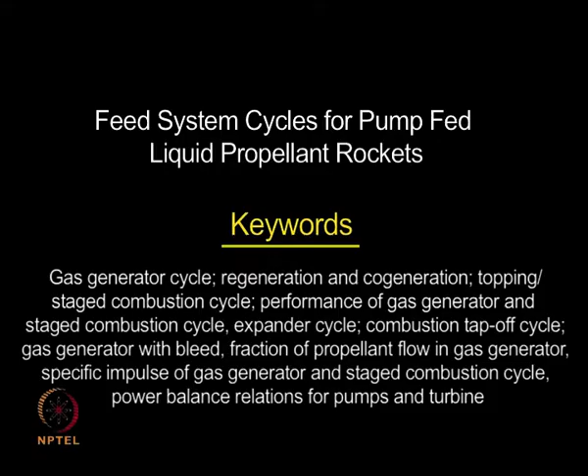Let us quickly recap where we were last time. We said feeding of liquid propellants can be done in different ways.

One was using a cold gas. Cold gas could be used either in the blow down mode or in a regulated mode. The difference is, in a regulated mode we draw gas at high pressure, maintain a constant low pressure on the propellant and push it out. In the blow down mode, in the tank itself we have some volume of gas known as ullage volume, which is pressurized initially, and you allow this pressure to gradually push the propellant, in which case the pressure at which propellant is supplied into the thrust chamber will keep decreasing with time.

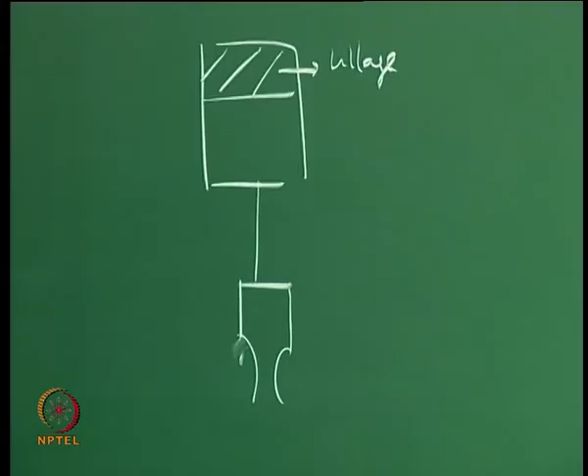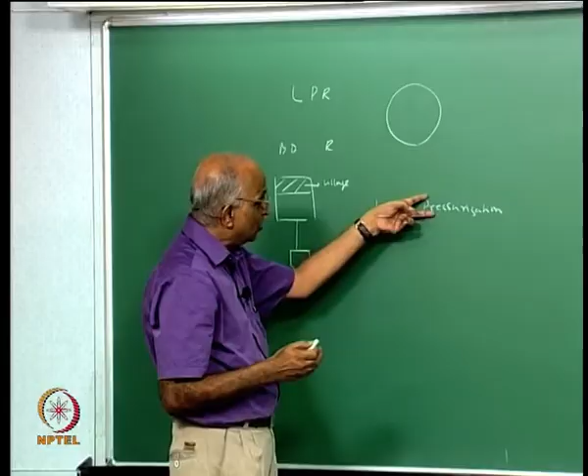While deriving an equation for the mass of gas required in the gas bottle, we found if the temperature of the gas is higher, it is better. Therefore, we also talked in terms of hot gas pressurization. But we said, even though it is advantageous, it has not been implemented so far and it will be worthwhile. In fact, there was one of the French engines which tried this, but they did not follow it up, but I think it is a strong contender.

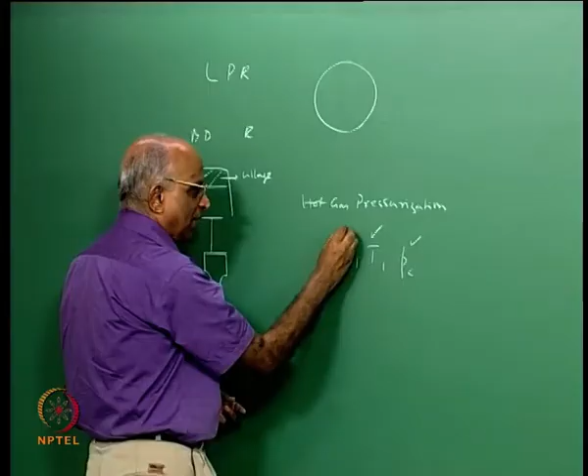We also found out that when the time of operation of a rocket is small, or when the thrust is small, or when the chamber pressure is small, we can go for something like cold gas pressurization in either the blow down mode or a regulated mode, or even a hot gas pressurization mode. But the moment the pressure of the chamber is large, or the thrust is large, or the time is large, we necessarily have to go for a pump fed system.

We also found that the amount of power required from the pump is enormous, something like for a 600 kilonewton engine we found that the power required is something like 2.4 or almost 3 megawatt, and we said even a large power plant like the Ennore power plant has only something like 450 megawatts of power. Therefore, we are talking of huge power, and therefore we cannot drive the pump using a battery or an electrical supply. Let's quickly go through where we were.

Therefore, in order to drive the pumps, we looked at this figure in the last class also. You have a fuel tank, you have an oxidizer tank, both are liquids. You sort of push this into the pump, maybe we need a gas bottle which pressurizes it to a small value, pushes it into the pump. I need to rotate these two pumps, for which I require a turbine. That turbine generates power and it pushes this.

To drive the turbine, I need something like a gas generator or a hot gas source which powers the turbine and the hot gas is exhausted out. The pressure built in these two pumps pushes the liquid oxidizer, pushes the liquid fuel into what we said was the thrust chamber. What I am circling now is the thrust chamber.

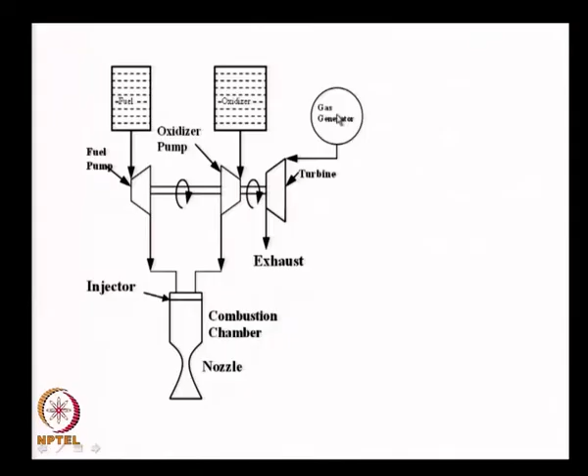Now, to have an additional thing for generating gas is difficult, because I need another set of fuels or another set of substances which can generate the gas, and the normal practice therefore is to make use of the existing fuel and oxidizer itself. How do we do that? We also looked at it in the last class.

Maybe after you are pressurizing the liquid fuel, you take a little bit of the liquid fuel into something like a pre-burner or a burner, which we call a gas generator. You take the oxidizer also, mix the two together, generate hot gases, push the hot gases into the turbine and exhaust the output from the turbine into the ambient. Therefore, you have a gas generator which is driving the turbine, which in turn drives the fuel pump and the oxidizer pump and supplies the fuel and oxidizer into the engine.

Such a feed system is essentially configured around the gas generator. How does the gas generator get the fuel? Maybe part of the fuel is bled, part of the oxidizer is bled from the lines, and it is used to generate hot gases. Now, there is a problem in all this, the turbines consist of blades, and it could be impulse turbine, reaction turbine, maybe we have to look at it.

But whatever said and done, if I put very hot gases into the turbine, and we said at stoichiometry the fuel and oxidizer generate gases at a temperature around 3600 degrees Kelvin, I cannot supply these hot gases. Therefore the output of the gases from the gas generator must essentially be a small number, maybe around an upper limit of 900 Kelvin.

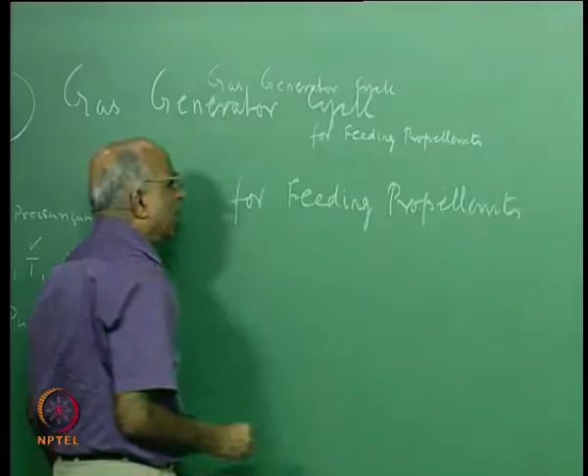Unfortunately, when we learn thermodynamics, we say a cycle is something wherein things come back to the initial state. But this is just using a gas generator to feed propellants. The word cycle here is not related to a thermodynamic cycle like an Otto cycle, Joule cycle, or Brayton cycle. It's just a gas generator fed system, but conventionally it's known as a gas generator cycle for feeding propellants, and I use the same terminology. We also told ourselves in the last class, well, this is what I had in mind.

We said that the temperature of the gases as a function of mixture ratio is such that the maximum temperature occurs just below stoichiometric, so you get a slight shift. Instead of maximum temperature occurring at stoichiometry, it's slightly fuel rich. But when we need a much lower temperature, maybe I have to operate the gas generator in a very fuel rich region such that I get only around 800 to 900 Kelvin, or maybe a very oxidizer rich region wherein I get a low temperature.

Oxidizer rich region is seldom used, but many Russian engines do use oxidizer rich. The reason oxidizer rich is not conventionally used is that something rich in oxygen can always oxidize a metal, whereas if it's fuel rich, it cannot oxidize a metal. Therefore, the trend is to use a fuel rich mixture.

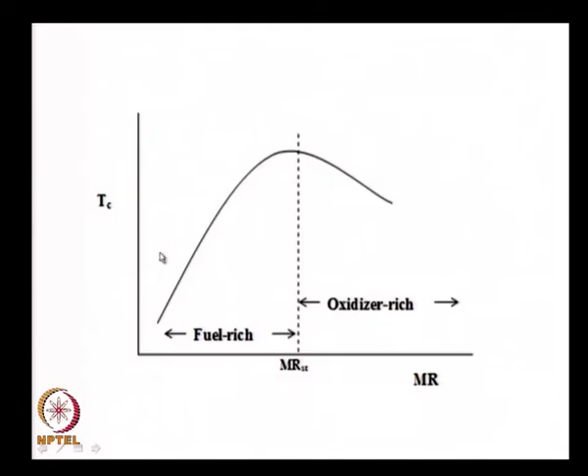This was in the context of the choice of mixture ratio for the gas generator. We tell ourselves we use a fuel rich mixture which has a maximum outlet temperature from the gas generator, or the inlet to the turbine, around 900 Kelvin.

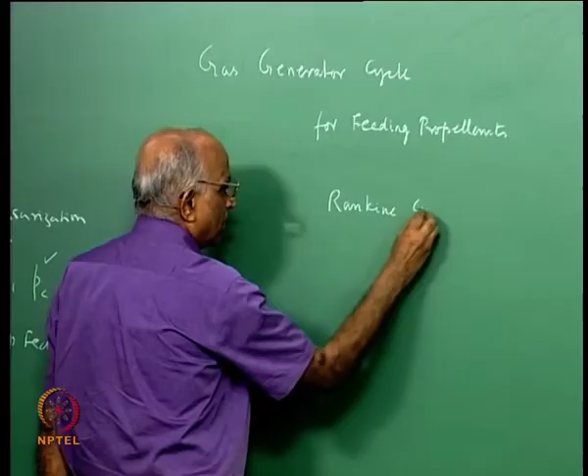We discussed the feed system cycles in the last class and said that the term cycle, which usually refers to a thermodynamic cycle, is really not valid. There is, however, a cycle known as topping cycle used in power plants, let's say the Rankine cycle, which is used in power plants.

What do we have? We have a boiler which generates steam. The boiler runs a turbine, that is, the high pressure steam runs a turbine, and that is what generates the particular power. Then the outlet from the turbine is fed into the condenser wherein water is condensed, and then you have a pump which pushes back the water into the boiler, the boiler heats it, and this is what is a Rankine cycle.

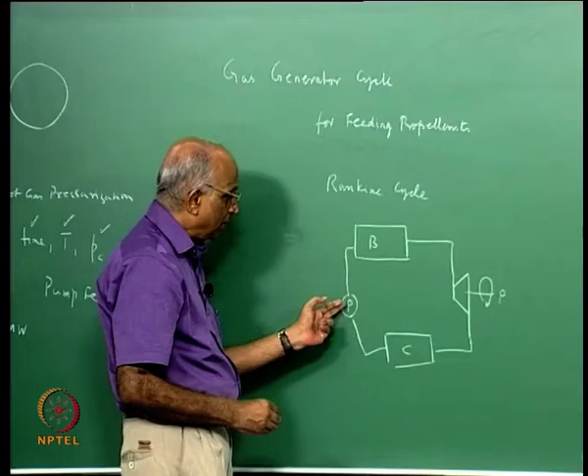Now, very often what is done to improve the efficiency - we know Carnot efficiency is maximum when the temperature is maximum. Now I am taking the cold water, increasing the temperature, then supplying heat, and then doing this cycle. If I were to bleed part of the gases after part of the expansion, I take it into something like a feed water heater and use this heated water into the boiler.

My efficiency will increase because my mean temperature is higher, and this scheme is what we know as the regenerative Rankine cycle, right.

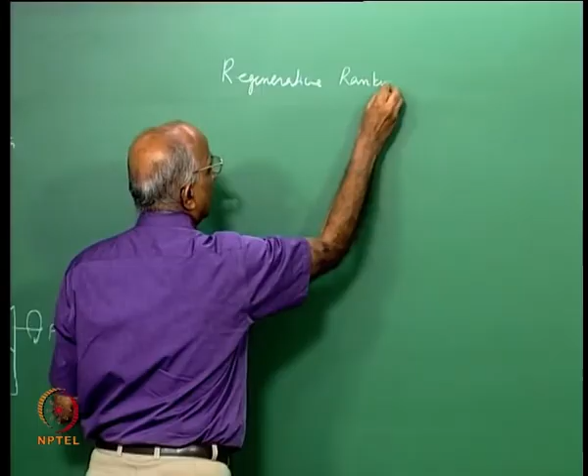Just like you have regenerative cycles, essentially what you do is you heat the water before this. How do you heat it? You bleed some of the partially expanded gases in the first turbine, allow it to heat the feed water, and then pump the feed water. This part of the cycle continues, and therefore you are able to get higher efficiency. These cycles are known as regenerative cycles.

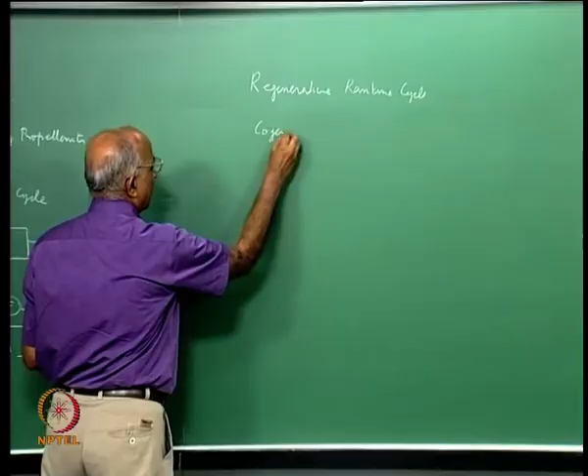We also learned in terms of cogeneration cycles. What do you mean by cogeneration? Maybe I bleed some of the hot gases or steam, perhaps at saturated level, and use it to heat houses, or use it for some other purpose. That is what is known as cogeneration.

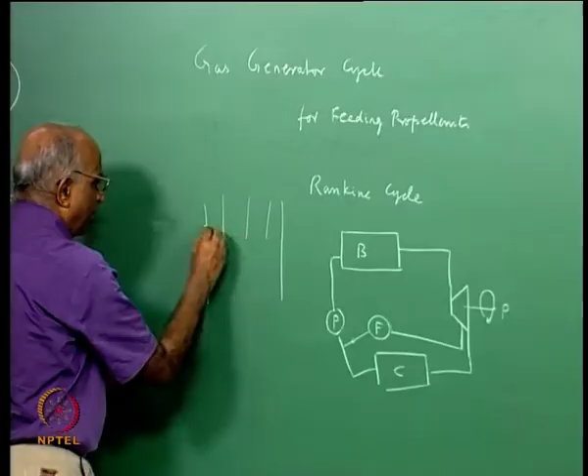That means instead of allowing the heat to dissipate in a condenser, where I have something like a tower in which water drips, the hot gases go and the hot steam condenses, heating the environment, that is, heating the water.

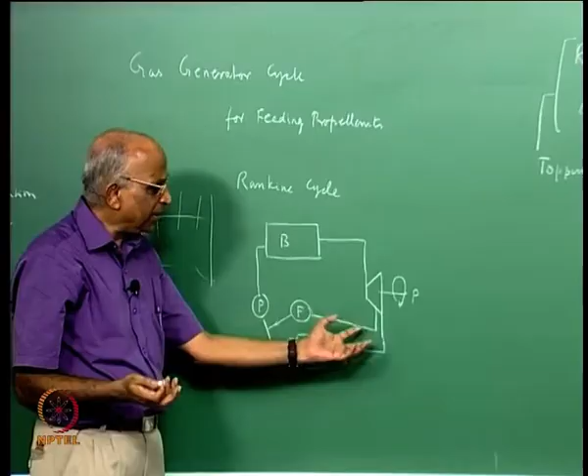Instead of heating the environment, I allow the steam to go and be usefully used for heating houses, heating some places, maybe some industry. That is known as cogeneration. These two cycles are also known as the topping cycle, because you use some of the heat for topping up your processes, whether for heating houses or improving your efficiency.

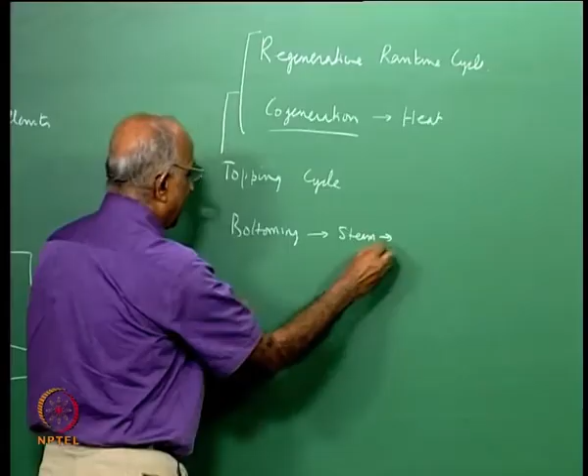If we talk of the topping cycle, we should also talk of the bottoming cycle. What is that? Maybe if I have a furnace generating very high temperatures, used to heat some product, like tempering steel or steel making, instead of allowing the exhaust gases from the steel making plant to dissipate into the environment, I use it to generate steam. This is a bottoming process, just the opposite of cogeneration, but using waste heat from the furnace to generate steam and therefore generate power or electricity. This is known as the bottoming cycle.

Therefore, when I consider the topping cycle, can I use some element of it in the gas generator cycle I just talked of? Let us try to put it together again.

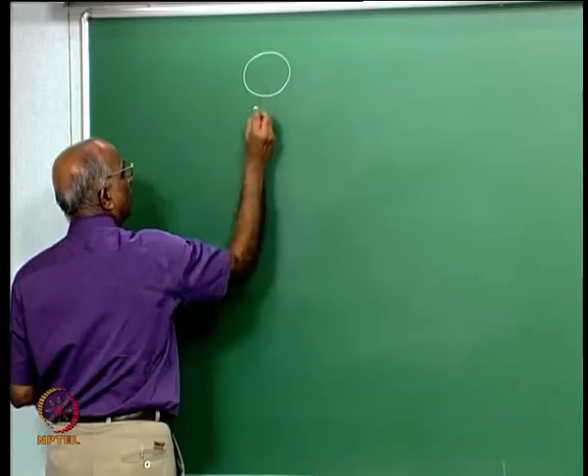We must be very clear about this because these feed system cycles are important. I have something like a gas bottle, and from the gas bottle I have two tanks: a fuel tank and an oxidizer tank. I take the fuel into the pump, I take the oxidizer into the oxidizer pump, and then push it out.

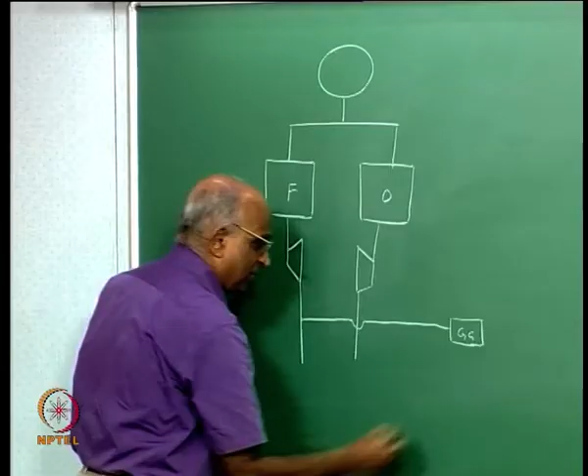Why is this gas bottle required? I need some minimum pressure to push it out, so my requirement of gas is much smaller since my pressure will be smaller. Then, after the fuel pump, I take the pressurized fuel into something like a gas generator or pre-burner, which generates hot gases at a mixture ratio that produces a lower temperature. Similarly, I take the oxidizer into it, make it react and generate the required temperature gases, and the balance I put into the main combustion chamber.

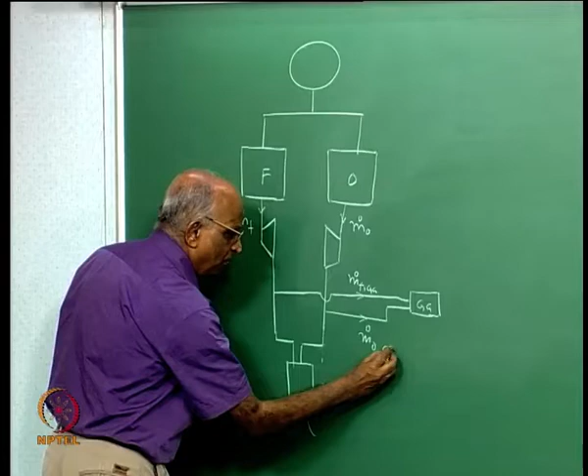That is what I can call the main combustion chamber or main thrust chamber. So what did we do? We have mass of fuel supplied by the tank, and mass of oxidizer supplied by the tank. Part of the fuel I bleed into the gas generator, and part of the oxidizer, which I call MO, I put into the gas generator. Now the balance that comes into the main chamber is m dot f minus m dot f supplied to the gas generator for fuel, and m dot o minus m dot o supplied to the gas generator for oxidizer.

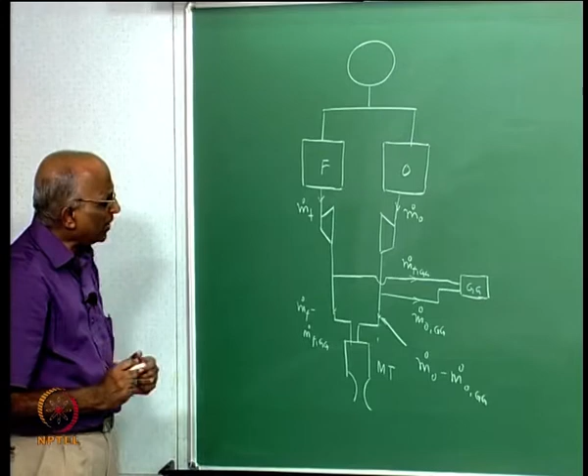So what am I talking of? The overall mixture ratio, that is, the overall fuel and oxidizer supplied to the system or overall rocket engine, is the mixture ratio R, equal to m dot o divided by m dot f, mass of oxidizer divided by mass of fuel. What is the mixture ratio of the gas generator? R gas generator equals m dot o, which gets into the gas generator, divided by m dot f, which gets into the gas generator.

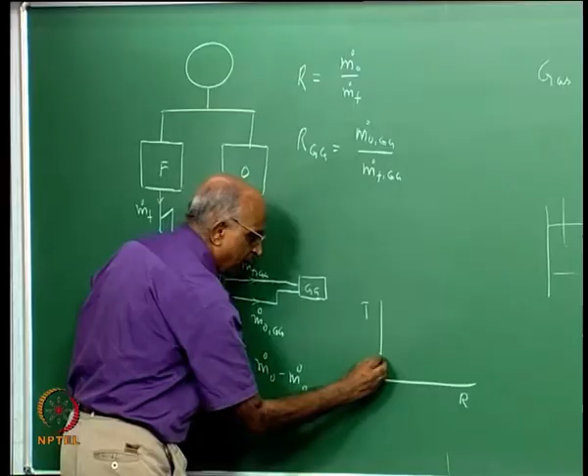This mixture ratio must be terribly on the fuel side. If I plot temperature versus mixture ratio, there's a peak near stoichiometry. To get a reduced temperature, I can operate on a fuel rich region, or somewhere in the oxidizer rich region.

Now I write the value of the mixture ratio in the main chamber, which generates thrust. Let us call it R_MC, equal to m dot O minus m dot O corresponding to the gas generator, divided by m dot F minus m dot F which goes into the gas generator.

Therefore, you have 3 mixture ratios to contend with. I would like these mixture ratios such that I get maximum specific impulse, but overall I would like to choose the mixture ratio such that I get good performance. Maybe we have to calculate this a little more carefully.

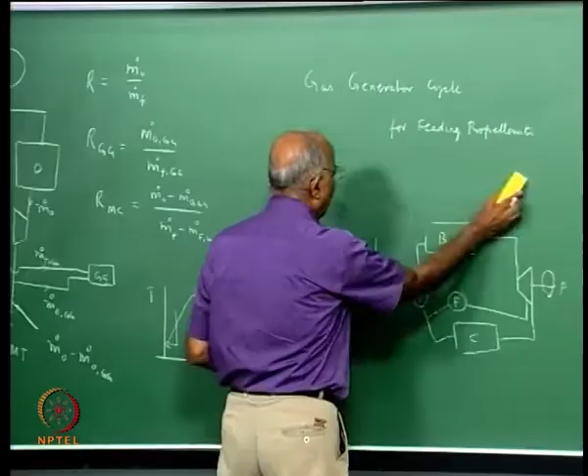Let us finish the topping cycle and come back to it. What is this topping cycle? What we have just described is what we call the GG cycle engine, the gas generator fed engine.

Now I ask myself, what did this gas generator do? It drove something like a turbine. In the turbine I have high pressure gases, I reduce the pressure to a low value, and then I take the gases out and exhaust them through a nozzle.

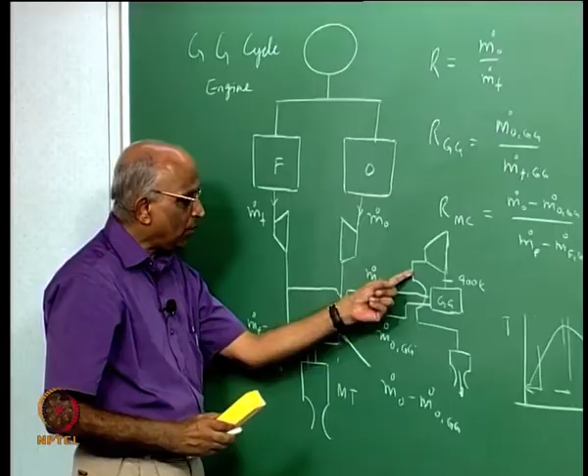This is auxiliary. The temperature at the inlet to the turbine, or outlet of the gas generator, is typically less than 900 Kelvin. Therefore the temperature at the outlet of the turbine will be even less, maybe around 400 or so, and the specific impulse this expansion can give will be a small number.

Let us call it the specific impulse from the gas generator, which comes from the exhaust of the turbine expanded through a nozzle. Whereas the specific impulse corresponding to the main chamber, we call the specific impulse of the main chamber. Therefore, what will be the total impulse I get?

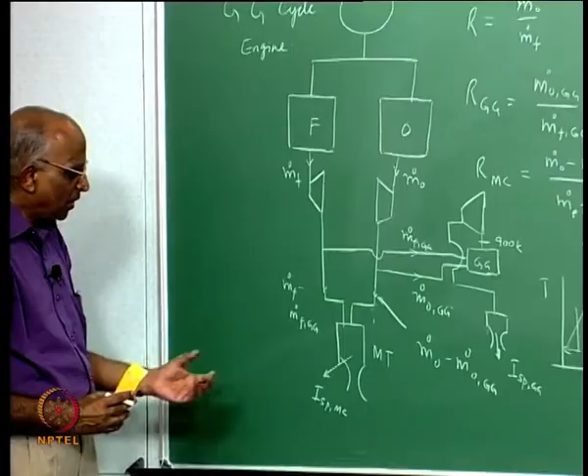It will be the fraction of propellant at this specific impulse plus the fraction of propellant at that impulse. If I want to find the total impulse, or total specific impulse, I call it the net value, it is the fraction of gases F of the total.

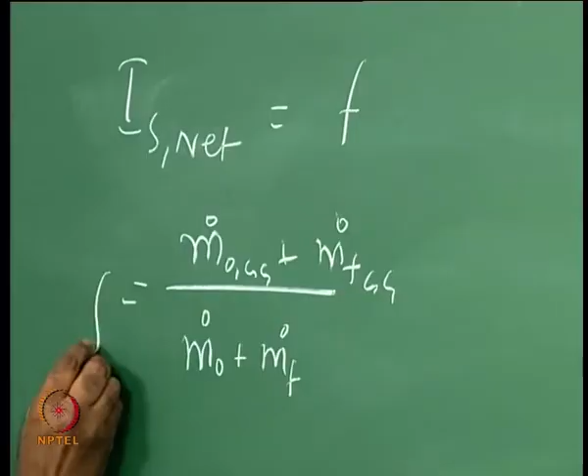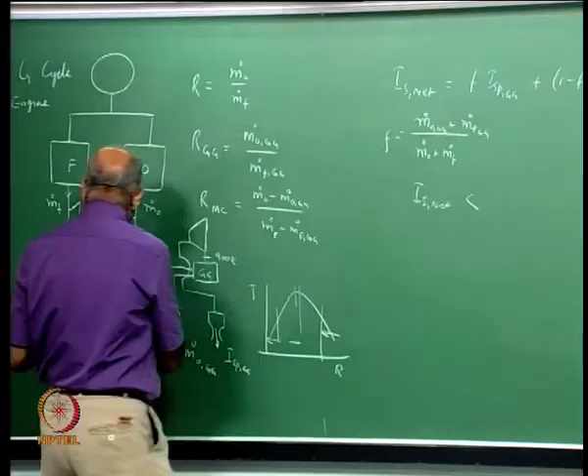We told ourselves this part is slightly weak because the supply temperature is small and the gases have expanded, so the pressure is small. Therefore the ISP of this will be much lower, and the net specific impulse of this gas generator fed engine will be less than what I would have otherwise gotten had I not done this.

Therefore the question is, can I take this heat which is being wasted in a poor way and bring it back into the chamber? In other words, it is very similar to the regenerative process in a Rankine cycle. This is what we call a topping cycle, let us put that together.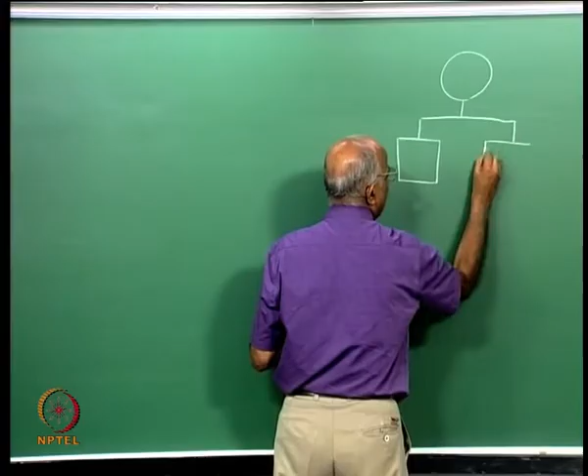Let me leave this space for analysis of the GG cycle and put this together. I again have a gas bottle, it supplies the two tanks, a fuel tank and an oxidizer tank. Then I take things out, and here I have a fuel pump which increases the pressure, and an oxidizer pump which again increases the pressure.

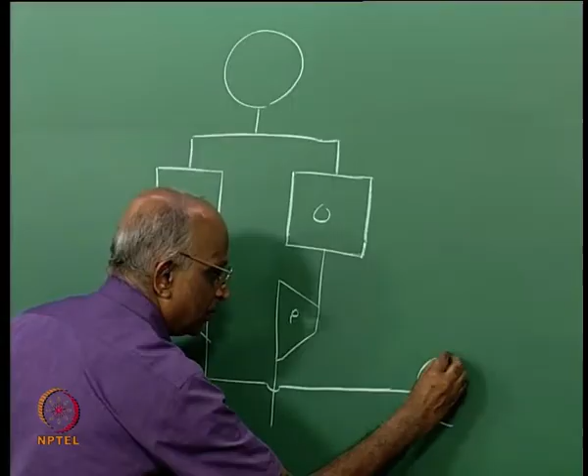I take the lines out, this is high pressure, I have a pump here for fuel and for oxidizer. I take some of the fuel at high pressure and bring it into the gas generator, and then I use this to drive a pump turbine. I bring the turbine here, high pressure becoming low pressure.

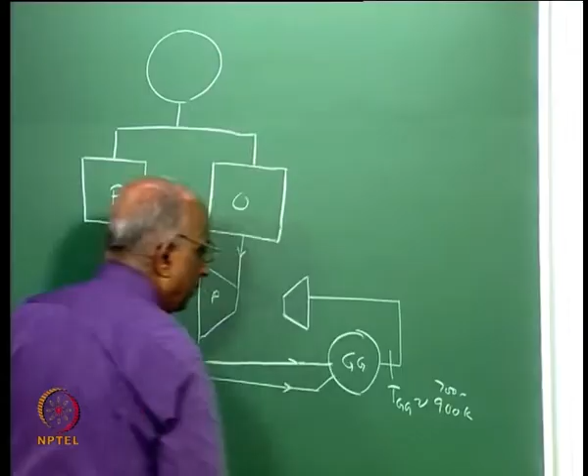Let us keep the directions clear. I also take a little of the oxidizer and allow it to come into the gas generator. The temperature of the gas generator is typically around 700 to 900 Kelvin, and this drives your turbine. Now what do you do with the turbine exhaust?

Let us see how to regenerate it. The balance of the fuel and oxidizer come into your main chamber. Now what do you do with this turbine exhaust? You bring the turbine exhaust out, and I also admit it into the injector. That means the heat left in the turbine is again regeneratively used here.

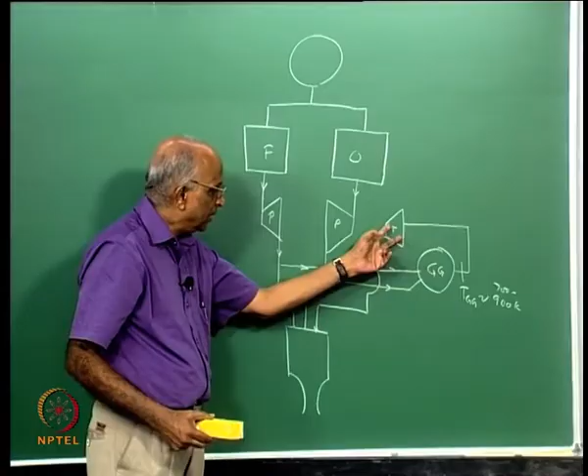This constitutes the topping cycle used for a feed system. In other words, the exhaust is not wasted with low impulse as in a gas generator cycle, but is fed back into the main chamber for secondary combustion. First combustion takes place here at low temperature, then the turbine expands it, and that is mixed with the other part of the process. The combustion now takes place in two stages, and therefore this topping cycle is also referred to as a staged combustion cycle.

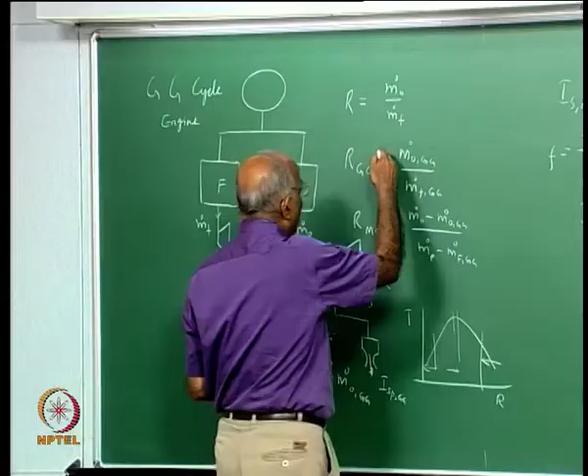Now we will try to find out the value of overall mixture ratio, the mixture ratio of the gas generator, and the mixture ratio in the main engine, just like we did for the gas generator. Let us do it for the staged combustion cycle.

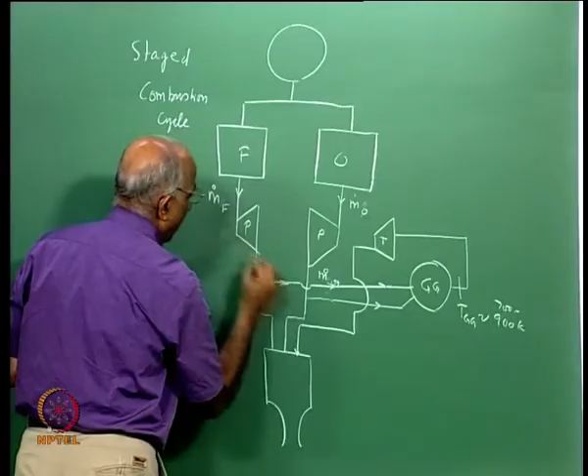For the staged combustion cycle again we say m dot of oxidizer, m dot of the fuel. I supply m dot O corresponding to the GG. This was your fuel line, so I take m dot F into GG, m dot O into GG, and then I had m dot F minus m dot F GG, and m dot O minus m dot O GG. All this is coming back here, and therefore the net value that enters here is still m dot O and m dot F, so the overall mixture ratio is m dot O by m dot F.

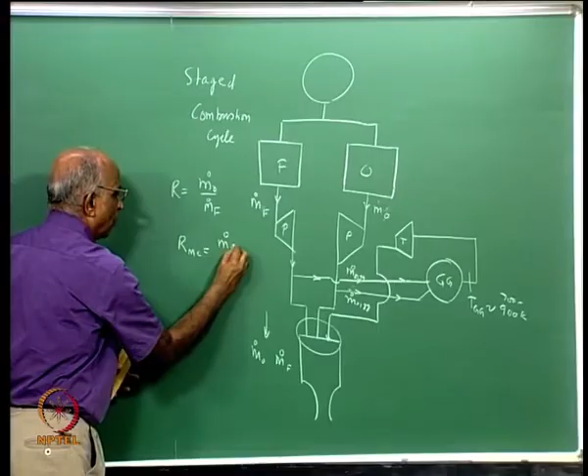The mixture ratio in your main engine or main chamber is again the same value of m dot O by m dot F in this case. And what is the gas generator mixture ratio? It is equal to, like what we had earlier, m dot O GG by m dot F GG.

This is the main distinction between a gas generator cycle and what we call a staged combustion cycle or topping cycle. When we use the gas generator in the staged combustion cycle, it is very often referred to as a pre-burner, because it first burns and then we have a second burn. The cycle is also known this way, the gas generator is called a pre-burner.

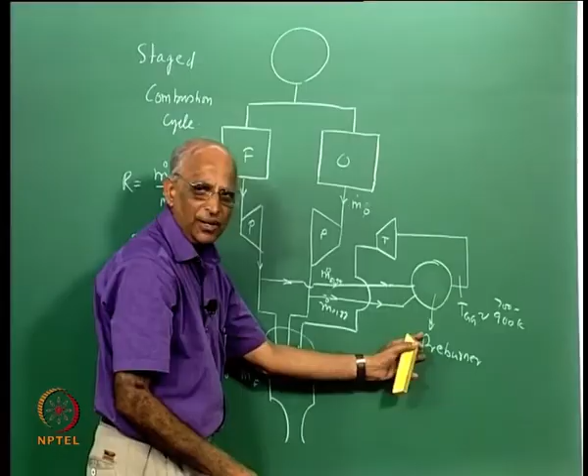Well, we need not even have something like a staged combustion cycle. When we talk of volatile fuels, meaning liquid hydrogen, or let us say liquid methane or liquid propane, it is also possible for us to have another cycle. Let us quickly plot that out.

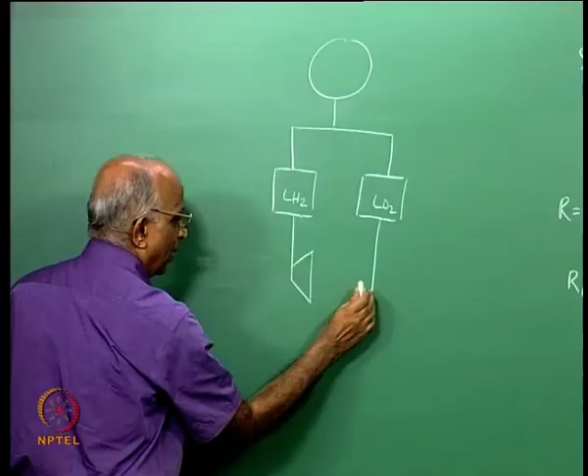Maybe I have a gas bottle, let us say I have a volatile fuel, liquid hydrogen or liquid methane or something like this. Maybe I have an oxidizer like liquid oxygen. In this case, what I could probably do, and which is also workable, is I have a pump here, and another pump here for the oxygen.

Now what I do is, this liquid hydrogen I have to supply to the combustion chamber. The combustion takes place in the chamber, it runs hot, and therefore I connect it to the chamber like this. The hydrogen flows along the chamber, gets heated, and this heated hydrogen I take out over here.

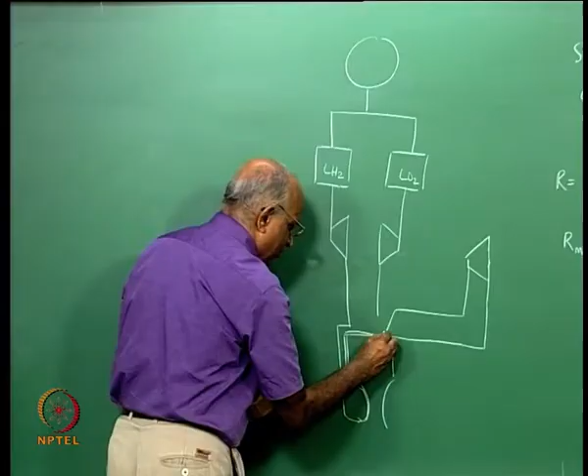I run my turbine using these hot gases, hot hydrogen vapor or hot volatile liquid, whatever is generated, and then I drive the turbine. Then I take the exhaust gases and put it into the chamber, I take the oxidizer and put it into the chamber. In other words, what have I done?

I have a turbine which is run by the heated fuel or heated oxidizer, whatever vapor it is possible to generate. I drive the pump of the fuel, I drive the pump of the oxidizer, and just by using the hot chamber I expand the gases in a turbine and run the pumps. Such a cycle is a derivation of the staged combustion cycle, but without a pre-burner, and this is known as an expander cycle.

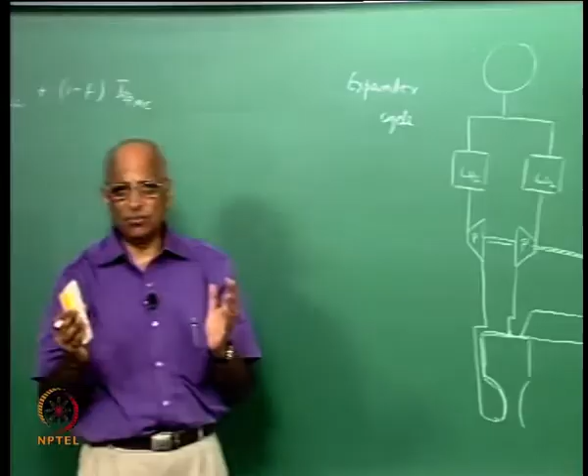Pump fed systems are basically classified as belonging to the gas generator cycle, in which case I allow the exhaust from the turbine to go into the environment.

Maybe the second is a staged combustion cycle, wherein I put a pre-burner and make the combustion occur in two stages, or I just use the hot vapor generated outside the engine.

Maybe in the next class I will cover regenerative cooling, and it will become clearer then. I use the vapor formed during cooling of the chamber to run a turbine. This turbine then runs the two pumps, which is known as the expander cycle.

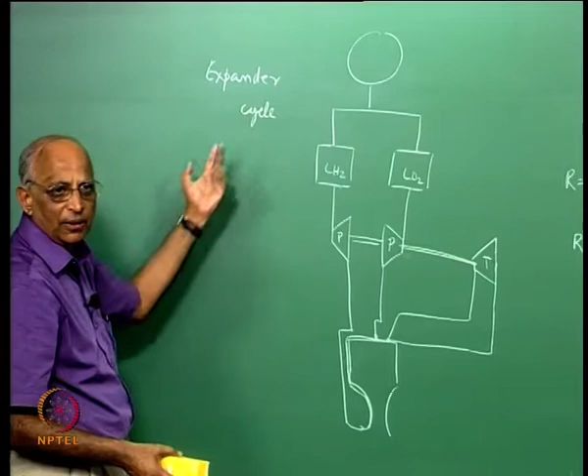We could have combinations of some of these cycles. Instead of allowing the exhaust from the gas turbine to come through this, maybe I can feed it into the nozzle divergent and try to generate a little more thrust, in which case the cycle is known as gas generator with bleed.

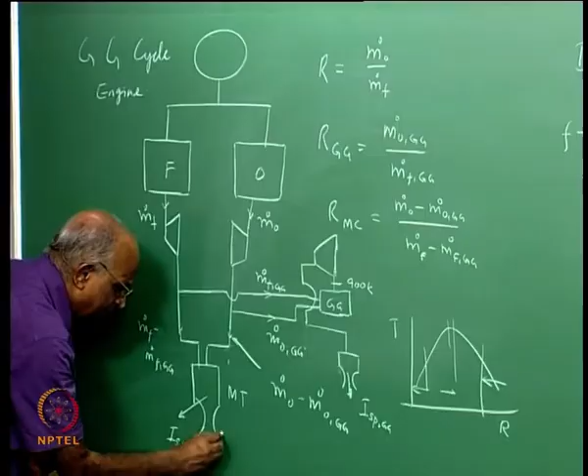What is bleed? I allow some of the output gases to come and generate a little more thrust by injecting it into the nozzle here. You could keep on devising cycles, or maybe I could have combustion taking place in the chamber, where I allow the gases to come and drive the turbine.

It is known as a combustion tap-off type of cycle, but it has never been used in practice. What has been used in practice is the expander cycle.

This, you will recall, I showed a cycle, I showed an engine, RL10. I said this was the first engine, the first cryogenic engine developed in the US. This uses an expander cycle.

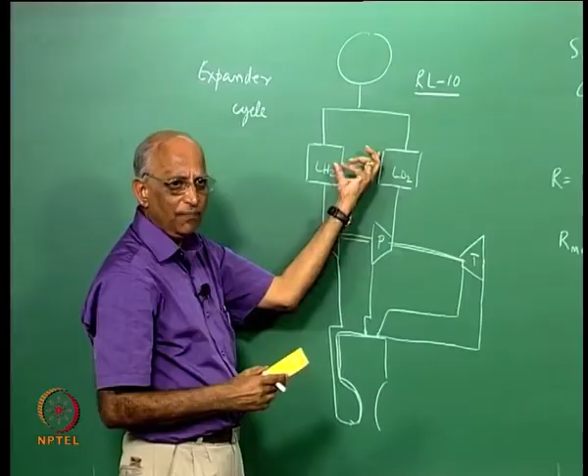Most of the cycles use the gas generator cycle, but the stage combustion cycles are extremely powerful and have very high performance, as we shall be seeing subsequently, and this is what is normally preferred. I think we will take a look at it. What is to be preferred, when, and why is what we must address.

But to be able to do that, let us now summarize whatever I have been telling so far. We said a liquid propellant rocket could either be pump fed or gas fed. For gas fed, we know how to calculate the amount of gas either in the blow down mode, regulated mode, or the hot gas mode.

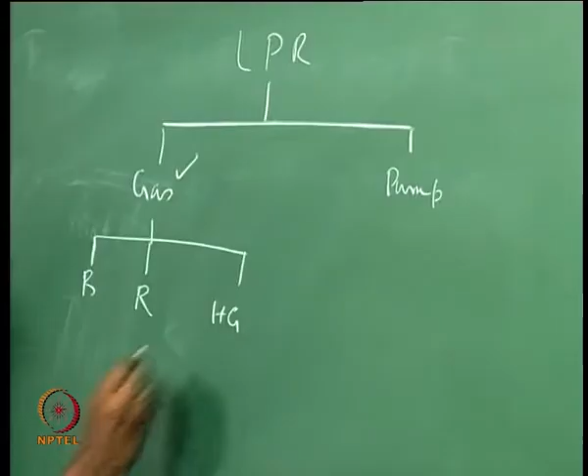When we talk of pump fed, we told ourselves: gas generator cycle, stage combustion cycle or topping cycle, and the expander cycle. We would like to know under what conditions do I use this cycle, when should I use this one, when should I use that one.

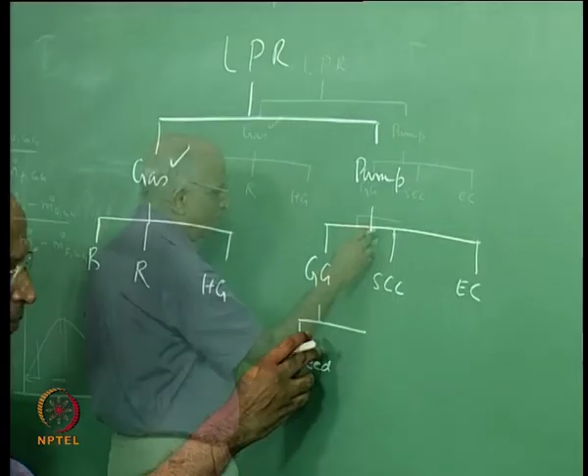Instead of having a separate pre-burner, I tap off some of the products from the combustion. But to be able to tap off a consistent mixture ratio is difficult, and that is the reason why such things are not used.

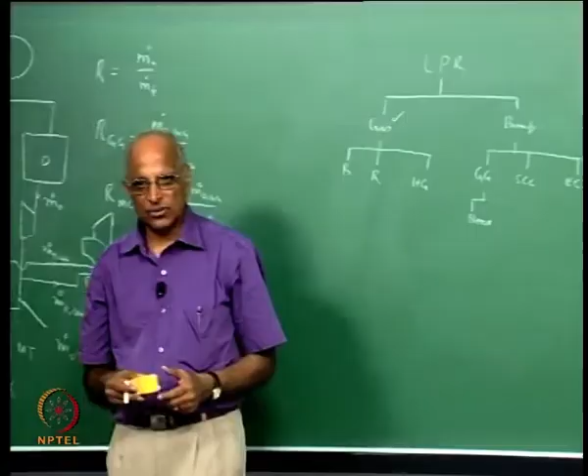We have several other cycles which are not of interest, but I think we must keep our minds open and try to see how best we can improve these cycles. If this part is clear, I can go back and analyze what cycle should be used when. Let's do this exercise.

We find that in the gas generator cycle, a fraction f is not very usefully used. Can I calculate that value of f? That is the first question.

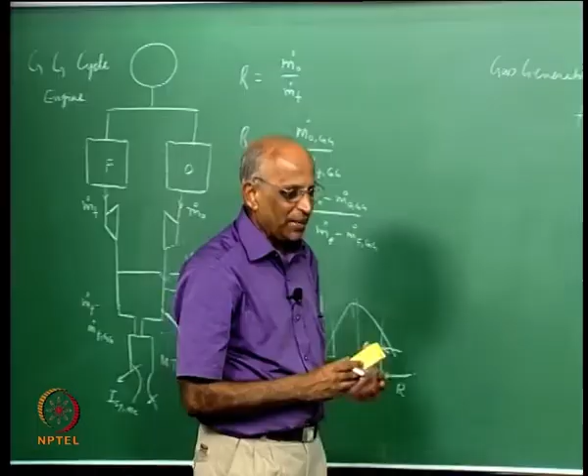But before I do this, let us quickly run through what little I have been doing. I think whatever we are doing is related to the feed system, and it is important. This is the topping cycle. Well, this is the expander cycle.

In the expander cycle, you have fuel and oxidizer. The oxidizer is pumped with this pump, pumped over here. The fuel is a volatile fuel; therefore it comes, cools the chamber, and the hot vapor so generated runs the turbine. The exhaust from the turbine is fed back, and that is why we call it the expander cycle. The vapor is generated during cooling of the thrust chamber.

Well, this is gas generator with bleed. The exhaust, instead of being expanded through an auxiliary nozzle, comes back into the nozzle in the divergent portion, and it is used to develop some more ISP, or some more specific impulse, of your rocket. I think this is all about it.

Let's now put things together. This looks clumsy, but it's exactly what I have been writing on the board. You have mass of fuel, mass of oxidizer, mass of this, and all that is shown in this particular figure. This I show for the gas generator cycle.

On this side you have mass of oxidizer coming into the pump, part of it is taken to the gas generator. In this case I consider the specific case of liquid oxygen, liquid hydrogen: mass of hydrogen coming into the pump here is taken into the gas generator, burns here, drives the turbine. The balance that comes in here is only fuel, that is m dot hydrogen minus m dot which goes into your gas generator. Similarly, you have oxygen coming in here, which is equal to m dot of oxygen minus m dot which goes into the gas generator.

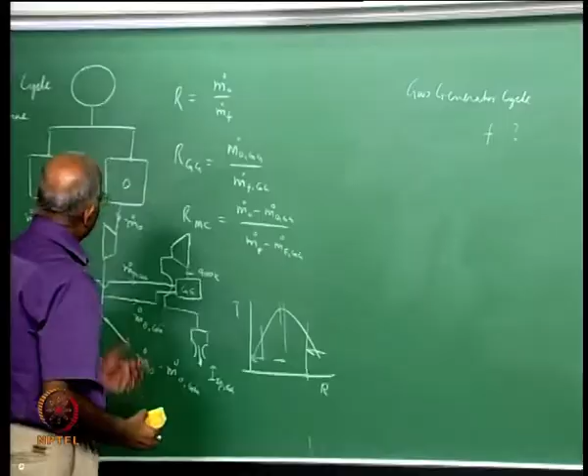See what is done over here. I forgot to draw this line over here, you should have reminded me of this. What is this line? I say that the turbine is rotating, the turbine rotates the oxidizer pump, the turbine rotates this pump, because mechanically the power generated in the turbine is running these two pumps.

Therefore, to be able to find out how much fuel is required, or what is the fraction of propellant which is required to drive the turbine here, I need to be able to find out how much pump power is required. Let us put it down. What is the power developed by the turbine?

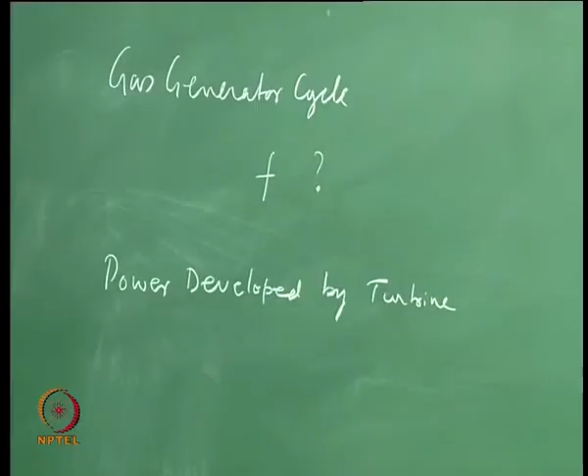And where does the power developed by the turbine go? It runs these two pumps, let us say pump for fuel, pump for the oxidizer, and this must be equal to the power required for the two pumps, right. Now, what is the power developed by the turbine?

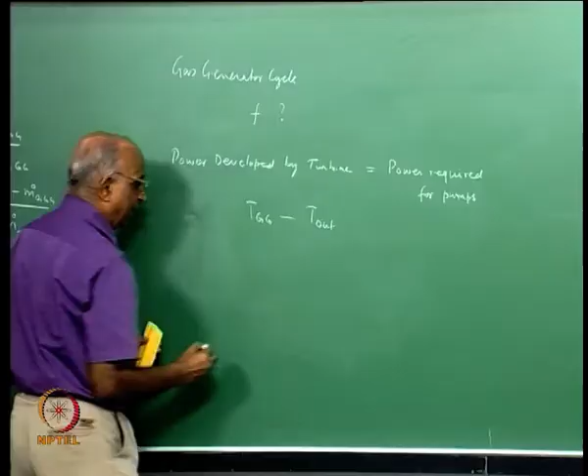We were very clear, we told ourselves the outlet temperature from the GG is, let us say, 800 to 900 Kelvin. We call the outlet temperature TGG, and this temperature of gases is what enters into your turbine. Let us say the outlet temperature from the turbine is T outlet. I again repeat, TGG is the temperature at which the hot gases from the gas generator enter your turbine. Some power is generated in the turbine, there is some expansion, maybe an impulse turbine, you are expanding the gases, and at the outlet the temperature is T outlet.

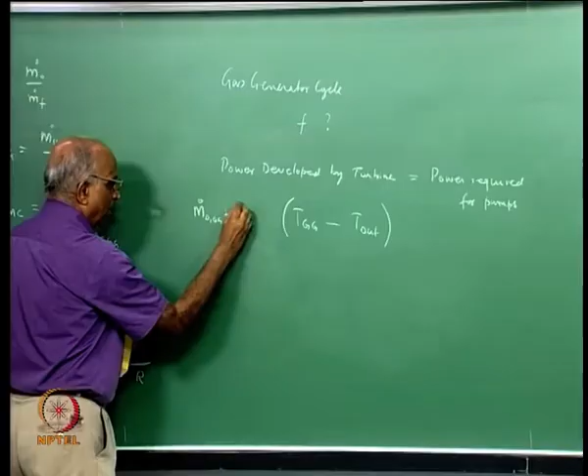Therefore, what is the work done by the turbine? Rate of work is equal to m dot of the gas generator, the mass of oxidizer and mass of fuel into the GG, that is the total propellant flow into the GG, into the value of Cp, that is your enthalpy, and therefore this is going to be so much watts. m dot Cp into temperature difference is the work done, and since we are talking of mass flow rates, the rate of work done is so much. Of course your turbine has some efficiency, let us say efficiency of the turbine, and therefore this is the power of your particular turbine.

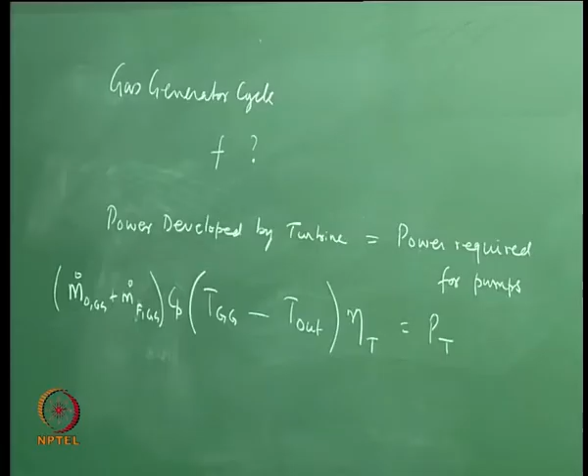Let us satisfy ourselves, let us make sure whatever we are writing: total mass flow m Cp into delta T is the enthalpy which is dropped in your turbine, which is the work done by the turbine. But we are not talking of mass, we are talking of mass flow rate, therefore this is the power of the turbine, the rate at which work is being done, or this I can also write as W dot T, right.

Can you tell me what is the work done by the two pumps? We have been doing it in the last class also.

Rate at which work is done by the two pumps, which is equal to the power of your two pumps, is what? Let us say the unit is watts, joule per second. How do I write it?

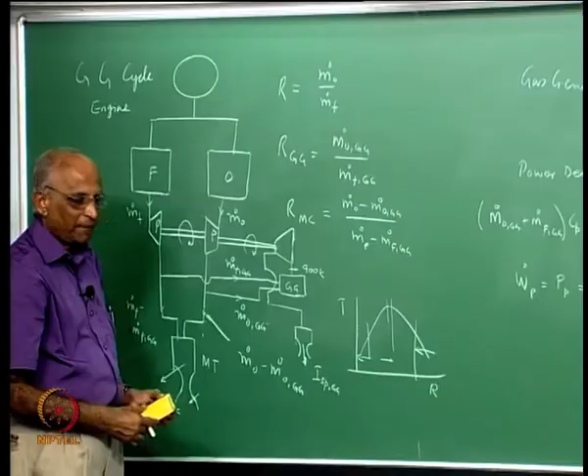Let us take a look at this. It takes fuel, increases the pressure from this value to this value. Let us say that the increase in pressure is delta P, Newton per meter square, let us say Pascal.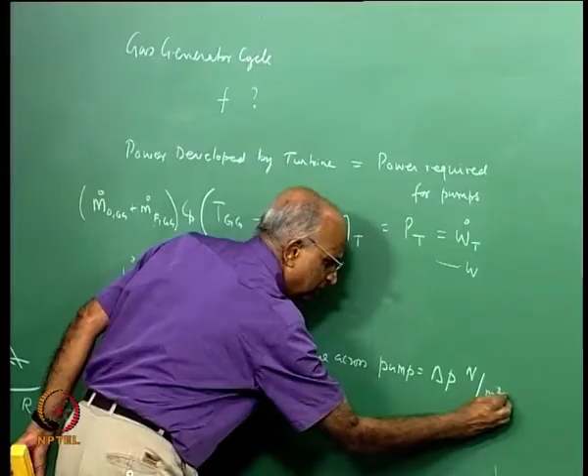And what is the work done by these two pumps? The work done by a pump can be written as delta P into the volume flow rate, where delta P is the pressure rise across the pump and volume flow rate means the rate at which flow takes place through the pumps.

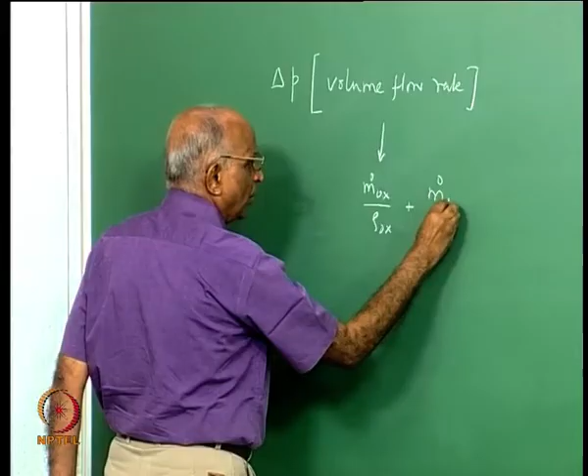The volume flow rate through the pump corresponds to the flow of the oxidizer and the flow of fuel, namely m dot oxidizer in kilogram per second divided by the density of the oxidizer, plus m dot of the fuel divided by density of the fuel. This is the volume flow rate of the fuel, this is the volume flow rate of the oxidizer, and this multiplied by delta P across the pump is equal to the work required to run the pumps.

If I look at the units, delta P has units of Newton per meter square, and these have units of kilogram per second, kilogram per meter cube, that means meter cube per second, which is equal to Newton meter per second or something like joules per second, or it is equal to something like watts. This is the rate of work required for the pumps.

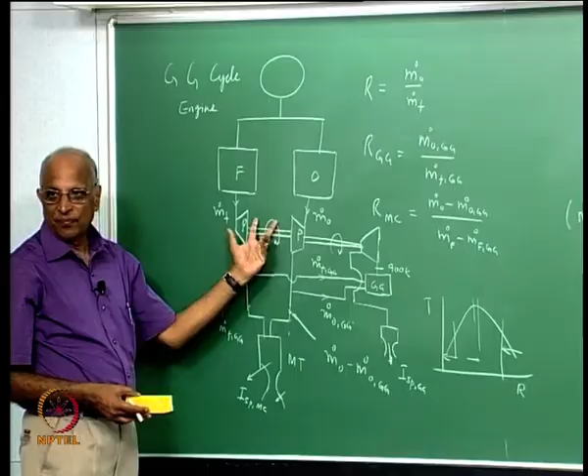For the present, to have a simple analysis, I have assumed that the pressure increase in the two pumps is the same. Otherwise, I have to have a separate expression for this, a separate expression for that. I am just trying to illustrate the method. I have assumed that the pressure increase across the two pumps are the same, which need not be the case. Whatever you are saying is true.

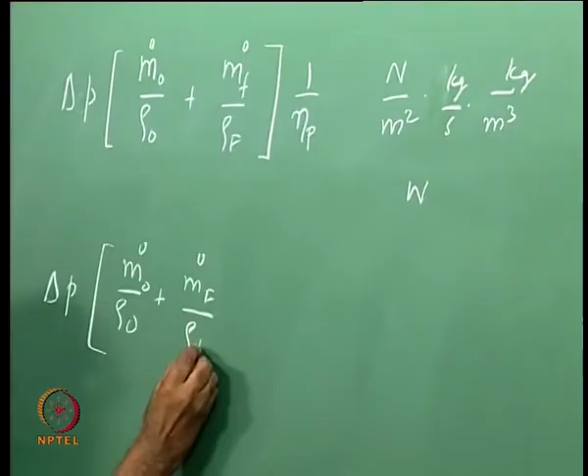Now, if this is so, I now say that my efficiency of the pumps is eta P, and therefore the total work required is so much, because my efficiency of my pump is small, I have to divide by it. Now I equate the rate of power required for the pump with what is the work available, and so delta P into m dot O by rho O plus m dot fuel divided by rho F into 1 over eta P

is equal to whatever I got before. Let us simplify it and write it as equal to m dot O into Gg plus m dot F into Gg, into Cp eta T, into whatever we have, let us take Tgg outside, giving 1 minus T outlet divided by Tgg. This becomes my expression.

How do I get the fuel fraction from here? Fuel fraction we said was equal to the fraction which is going into your gas generator divided by the total. Let's simplify this a little bit more.

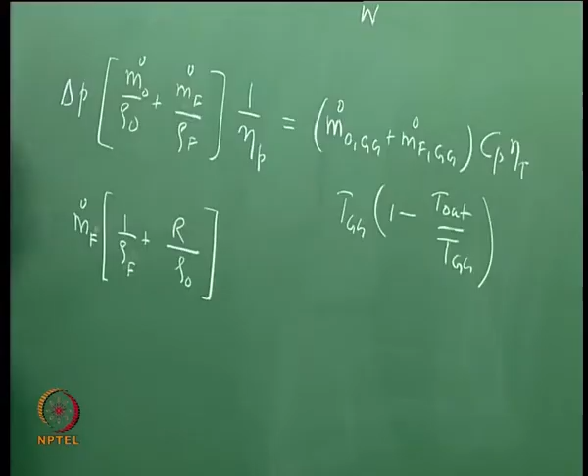Let's rewrite it: m dot O into 1 over rho O plus m dot O — no, let us take m dot F outside, in which case it becomes simpler: m dot F into 1 over rho F plus m dot O by m dot F, which is your overall mixture ratio, into the value of rho O, into 1 over eta P

is equal to, same thing again, I take m dot F going through the Gg, and now I write 1 plus Rgg into the value of Cp eta T Tgg. Now, if I assume isentropic expansion in the turbine, T outlet by Tgg, or T1 by T2, equals P1 by P2 pressure ratio to the power gamma minus 1 by gamma, or rather this becomes 1 minus 1 over the pressure ratio to the power gamma minus 1 by gamma.

Therefore, I get T1 by T2 is equal to, and this is what I set as a pressure ratio. Okay? No, let's go slowly, but let's do things completely.

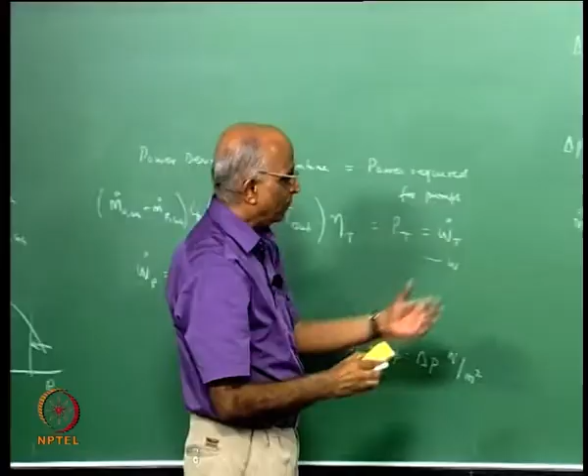Therefore, if now I have to simplify this expression, what is it I get? I get the value of m dot of the fuel through your gas generator divided by m dot of the total fuel which is going, is equal to, now I take eta p on this particular side, say the product of the turbine efficiency and your pump efficiency is total eta.

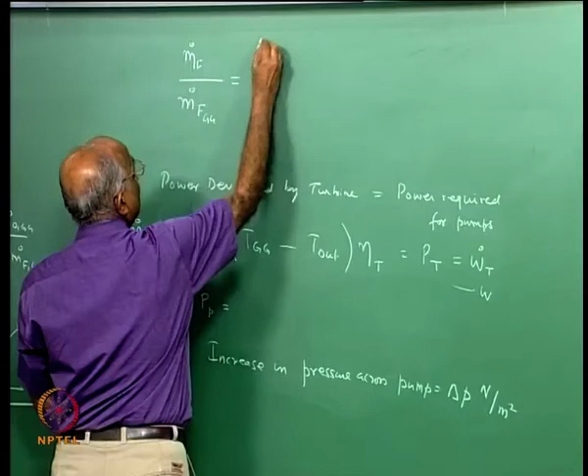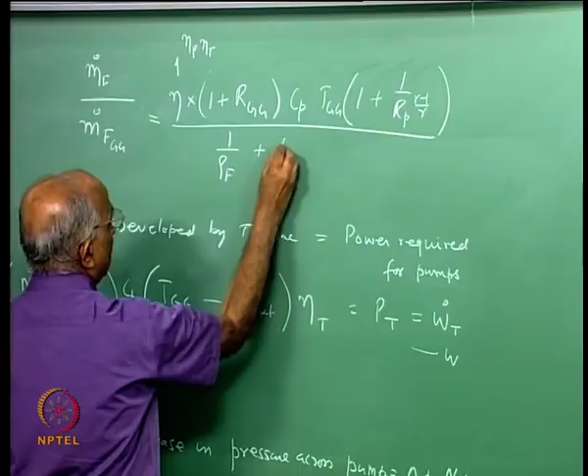Let me divide it over here, which means I put this equal to over here, 1 over rho f plus the overall mixture ratio divided by rho naught.

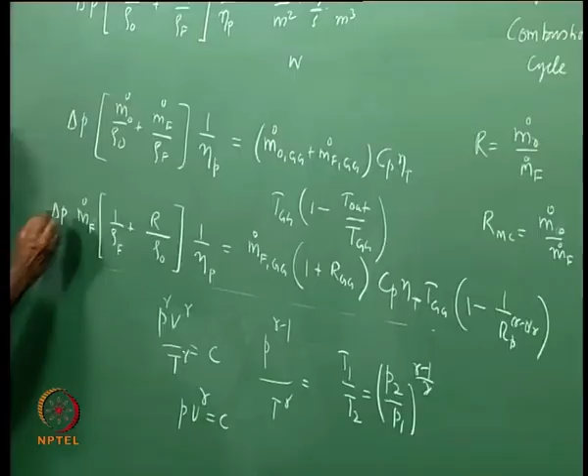Is this okay? Please check whether we have left out any terms. Yes, where does delta p come? M dot f into this into delta p. That means here also we should have had delta p, here we swallowed the value of delta p over here, that means delta p over here.

Where 1 minus? 1 minus r gamma minus 1 by gamma. Good. Anything else?

Therefore, we are able to find out the value of m dot f by m dot f gg, but still what is it I want? I want to find out the fraction of the fuel which is going through your particular gas generator. What is it I am after?

F is equal to m dot o, or m dot oxidizer which is going through your gas generator, plus m dot fuel which is going through your gas generator, divided by m dot o plus m dot fuel, that means the net value of these two is the fraction. That means the fraction of propellants going through your gas generator divided by the total over here.

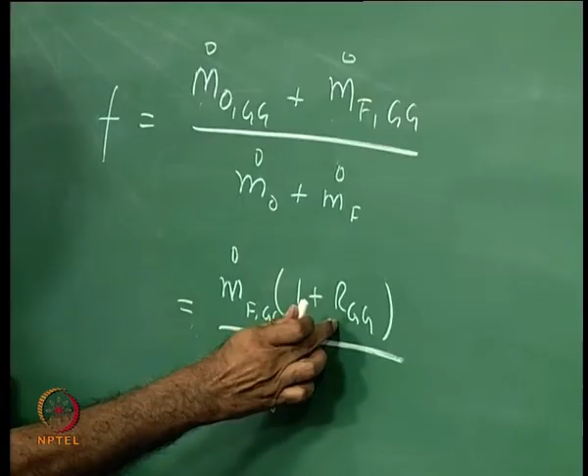Now this I again simplify as m dot o gg into 1 plus r gg divided by m dot o, m dot f into gg into 1 plus m dot o gg by m dot f gg is the mixture ratio over here, m dot o gg, or let us again take m dot of f into 1 plus r. Please let's be very clear about it, and this is equal to your f.

But what is it we have got here? We got m dot f by m dot o over here. Maybe I have to now convert it into some form wherein, yes, m dot f divided by m dot f gg, correct.

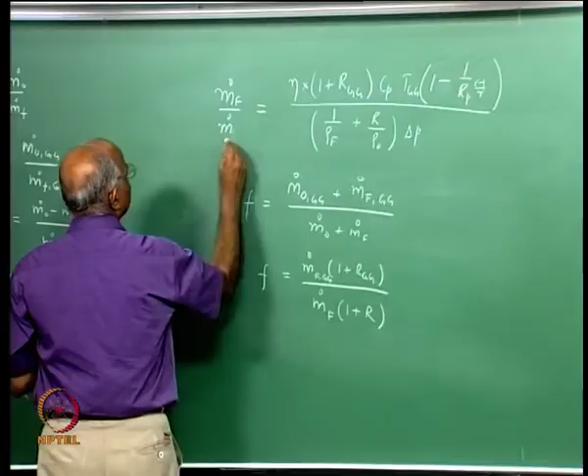Therefore, we have this, we have m dot f divided by m dot f gg divided by m dot f over here. Let us substitute the value, and what is it I get? I get the value as 1 over rho f plus the value of r divided by rho naught, into delta p,

the value of eta into 1 plus RGG into Cp into TGG into 1 minus 1 by Rp into gamma minus 1 by gamma, 1 minus the value here, and this is equal to,

I have to now get the value of m dot f multiplied by 1 plus RGG divided by, I now find into 1 plus R, is equal to the value of f. I find that 1 plus RGG and 1 plus RGG gets cancelled, and therefore f is equal to 1 plus

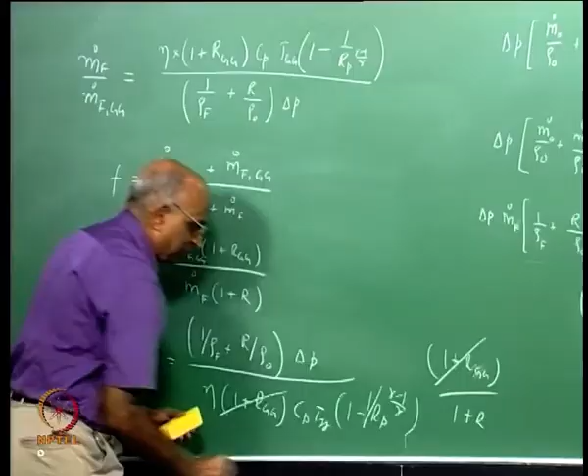Now I want to discuss these results. How do I do it? Maybe we will do it in the next class before I proceed further.

Therefore, what is it we have done in this class? We wanted to calculate what is the fraction of the propellant which flows through your gas generator, and we have got an expression for this. We will quickly go through this expression and then we will see in what way to interpret the results. Thank you then.